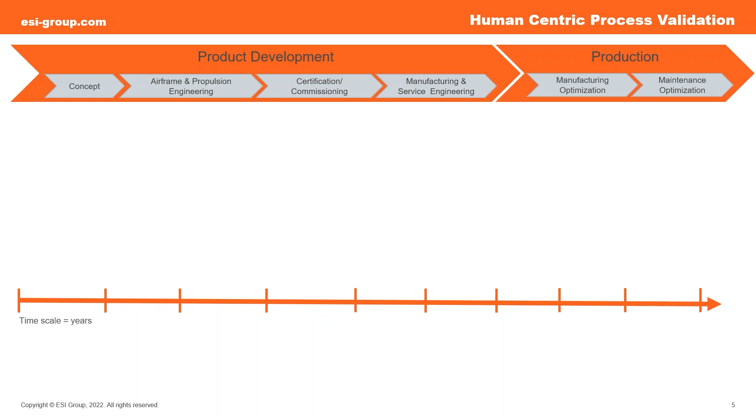Eric, back to you. Thank you. So when we talk about this idea of validating a human-centric process, or a better way to just say that besides human-centric, is any process or procedure that humans play an integral role in performing, and they have to interact with these new products or new aircraft in the context of performing some procedure or process with that new aircraft product.

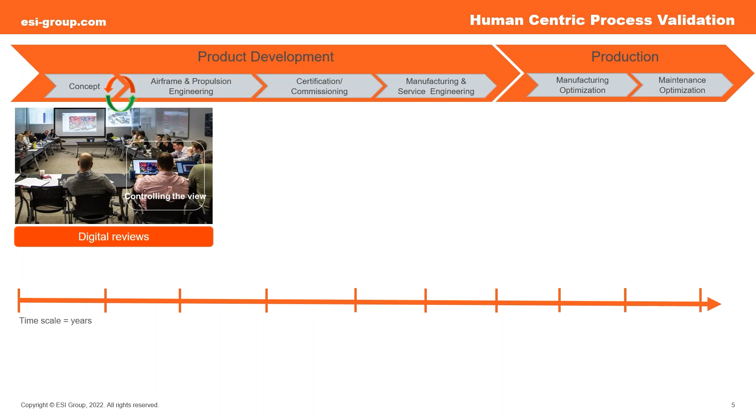A little bit later on, as we move away from just having the digital designs and we start manifesting, we start actually creating and bringing into reality physical proofs of concept, physical prototypes of those products. Maybe when we're getting ready for flight certification, maybe when we're getting that flight ready prototype out for certification and commissioning of that future aircraft. And then we actually have a physical aircraft to examine, to discuss, and explore.

Now, at that point is probably when we can focus on product engineering and product integration concerns, right? So if we're doing an engineering review, we're looking at things on screen, now is the time for us to recognize that something about the product geometry, something about that product engineering decision is inappropriate for packaging, for space claim, or for people to work in and around.

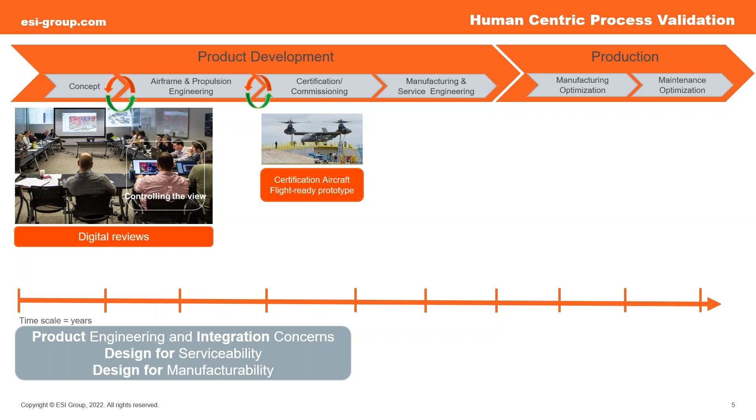Maybe we have to redesign the part to make it more serviceable, or maybe we want to redesign it to make it more manufacturable, or just so it better integrates with the rest of the aircraft. But once we cross past that milestone of having a flight-ready aircraft and getting that certification rubber stamp, that green light from the authorities, we start going into production ramp up.

This is when we start building up our production environments. Maybe we build that up off-site and migrate the tools over from a vendor or supplier into our production facilities, or maybe we build the production line in situ on site. But now when we're really building physical parts, physical prototypes, and pre-production flight-ready aircraft, this is when we actually learn a lot about how people will interact with that product.

And as we're doing that production ramp up, and trying to optimize that production environment, we make discoveries that tell us that earlier decision about the manufacturing process, or about the assembly process or assembly tooling, maybe wasn't such a good idea, and we want to go back to the drawing board and make new decisions about how we do assembly or service.

Then once we start getting those aircraft into production and we see serial production, and we have a fleet in service that's actually flying, that's when we start really learning the most about how people will perform those maintenance or service processes on that future aircraft. Or at this point, it's not a future aircraft anymore, it's a current day aircraft.

And the risk we run into is that every once in a while we'll run into something where we can't just make a new procedural change, we can't just make a new tooling or workspace change, but in fact we want to go back and change something about that product design.

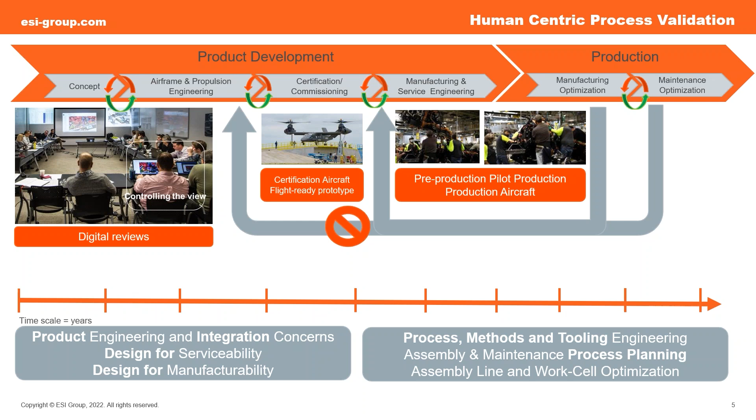We made all those design decisions before we went into certification. After we come out of certification, hopefully we're only focusing on those human interactions with the product in the context of the processes we're trying to define and validate.

Now, chances are those of you who said yes on that survey know that you're already doing some of this. Chances are you're using some of your CAD design tools, some digital mock-up or DMU tools, or you have some sort of process planning, human-based process planning tool that you're working on your desktop. That helps us recognize and potentially resolve quite a few problems that could emerge.

Now, if we couple that with using computer-aided simulations, what you might think of as deterministic simulation, to simulate and analyze how the aircraft is going to function and how it's going to be assembled, we can learn a lot and maybe solve some of those issues.

Maybe by building physical prototypes and getting more of our experts to apply their expertise and experience to looking at that aircraft design and the processes we're planning for it, we're able to resolve even more issues. But there's always that tip of the pyramid where we still risk that there could be something we didn't see, because we didn't know to go looking for it in that digital data.

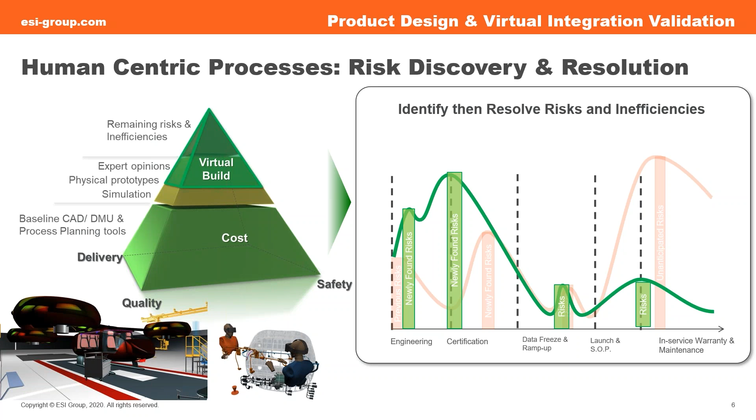the physical aircraft, we optimize our opportunities to design our way out of those issues before we actually put anybody at risk and risk any of our investment or our assets in engineering.

So generally, when we talk about this idea of doing human-centric process validation and doing this virtual product integration, what we want to do is we want to do all of these product-based decisions as early as possible by creating

for people an opportunity for them to validate their product integration decisions. Their design for service or their design for manufacturability decisions as early as possible.

And then after we go through and start stacking up the line and start preparing the tooling, preparing the workspace for doing this assembly and service work in the future, we want to make sure that those assembly and maintenance

process plans are validated, that we know that they work, and that there shouldn't be any surprises when we start going into physical build and physical mock-up.

We are no longer surprised and making new discoveries. These are things we've already observed and hopefully mitigated out of design. And that's what we mean when we use the phrase human-centric process validation.

So human-centric processes, as we asked in that poll earlier, how do you validate that and do you have a method? What I was asking was, do you have in your engineering process a time and a milestone

when you are validating that humans can perform that final assembly and final trim out or final construction of that aircraft.

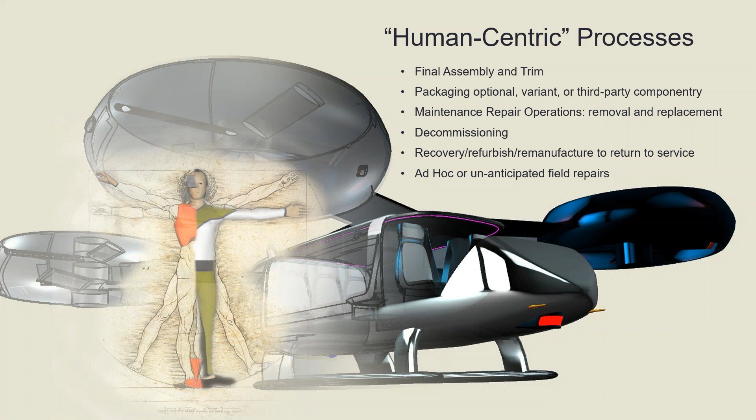So what we're going to do is we're going to go ahead and take a moment to launch another poll before I hand it over to Meredith, who's going to give us a few more examples of these procedural checks.

Great. Thank you, Eric. Attendees, how do you evaluate packaging, accessibility, ergonomics, and other factors when planning assembly and service processes?

During tooling or equipment buy-off at a supplier's site? During engineer milestone release or gate meetings? With physical prototypes or mock-ups and pilot builds? Continuously with virtual reality builds? Or you do not? We'll give you a moment to respond.

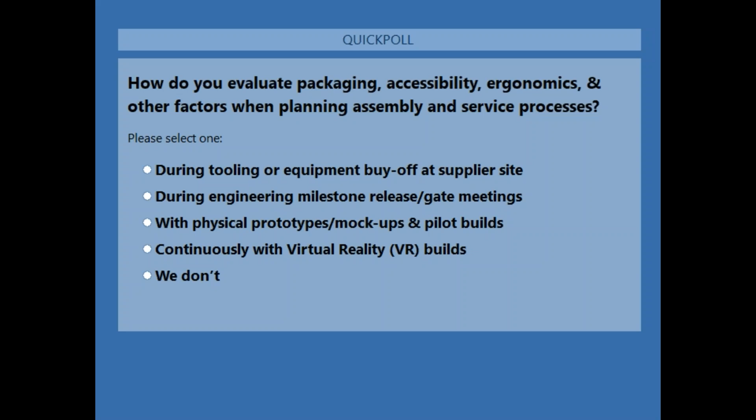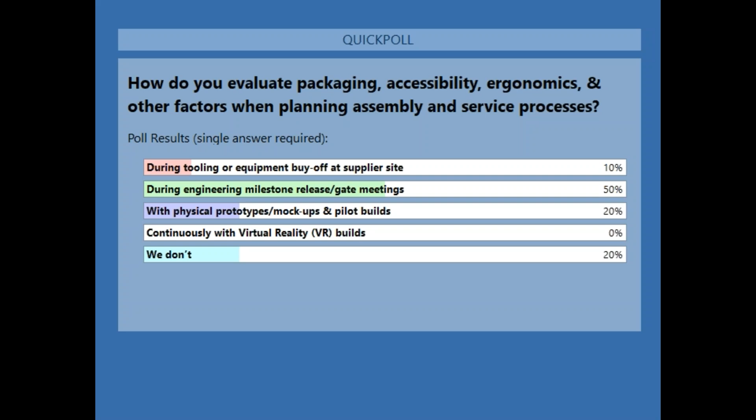And here are the results. 50% selected during engineering milestone release, tied with 20% each selected with physical prototypes or they do not, and 10% selected during tooling or equipment buy-off at supplier site.

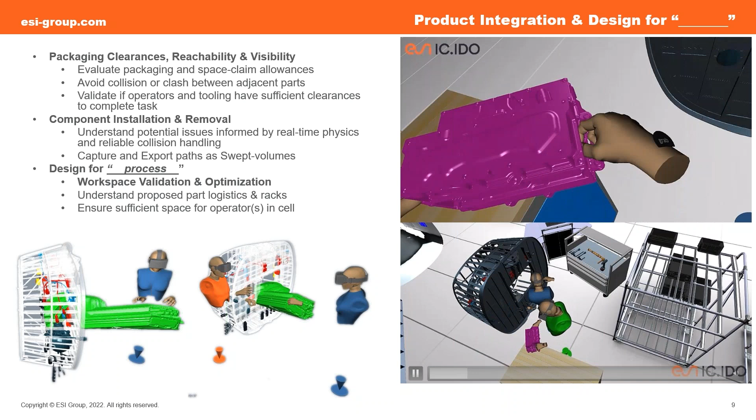Awesome, thank you Eric. You gave a really good introduction to VR and what that might look like. My goal here is to give context. Everyone wants to accomplish those things that you talked about, right? We want to identify our issues earlier. We want to understand how our operators are going to interact with our parts. We want to save our time and our money, right? So what exactly does that look like?

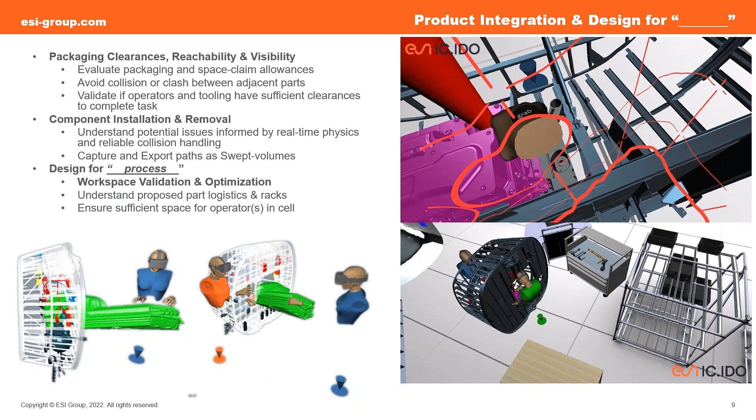So I performed an engineering review, which is what you're going to see on your screen here with this video. I'm immersed in IC.IDO here, and that's what you'll see in the top right of your screen - my view in IC.IDO. This is my first person interaction. And then on the bottom there, you'll see the third person external view.

So as you see in my view, I'm looking at a battery install. This is a sub-assembly where we're just looking at what path this battery is going to take. So I can get a really good understanding once I'm immersed of how I'm going to interact with this part, where my hands might be. If I have any reachability concerns or visibility issues, I'm going to be able to identify that right away. As soon as I'm installing this battery into its location, I'm going to be able to tell if there's any of those issues.

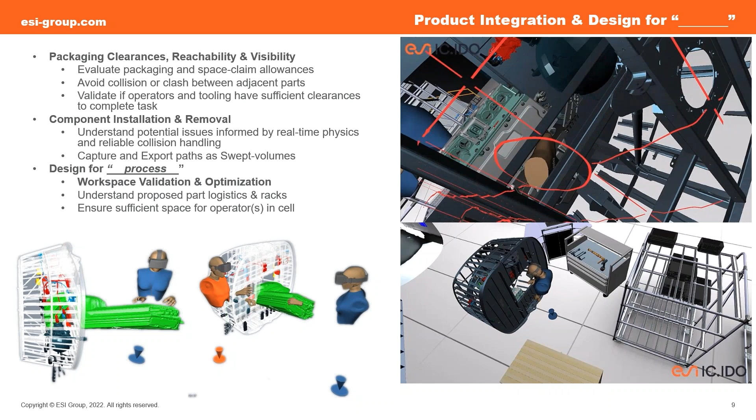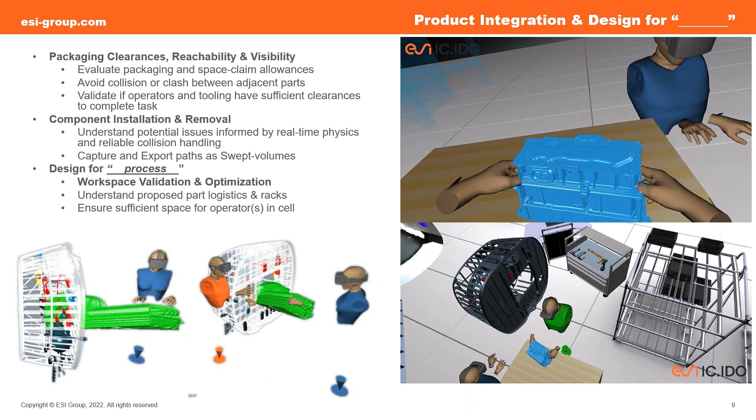So we're looking at the installation and removal of this battery. And you'll see in the bottom left of your screen that image looking at the swept volume, which is giving us the exact path that the part is taking. So I can record myself installing or removing this battery, and it's going to show me the exact path. I can get a good idea just by picking up that part, putting it into its position, but the swept volume is really going to quantitatively show me exactly what that looks like.

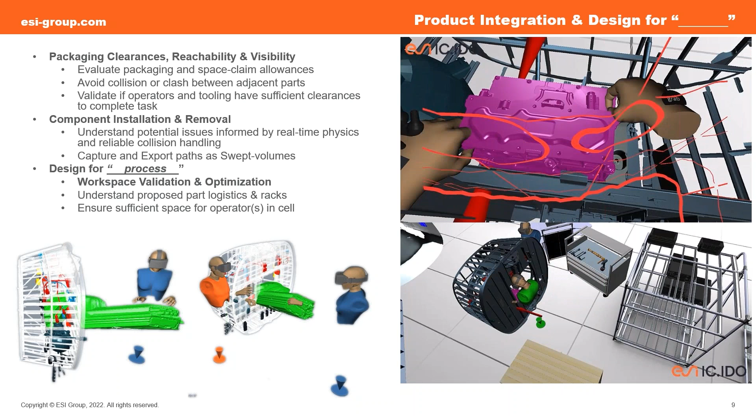So you'll see some of those collision arrows appearing there, and that's IC.IDO telling me that I have some sort of collision. My parts aren't allowed to pass through each other based on what I denoted the properties to be. So again, I'm getting a really realistic view of what this install might be.

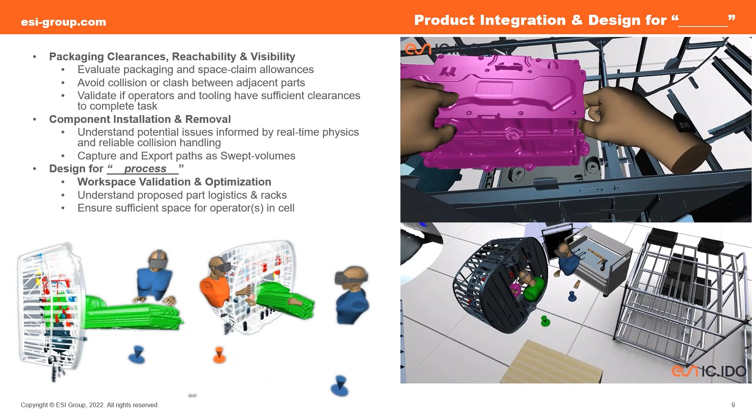And when I did this, I actually noticed it was really uncomfortable for me. I'm on the shorter side, and I still had to bend into that little small compartment. I had to tilt my head. You can kind of see my green avatar there tilting a little bit. And I asked my counterpart, why don't you try this out? Why don't you test this operation? Can you complete it from the backside?

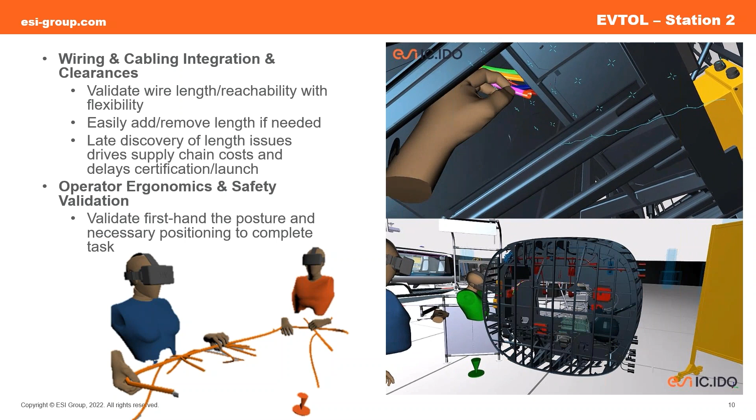And we're having a real design review here, right? Where I can ask for direct feedback right away, and understand what our operators will be doing without having to build one part. I'm just taking this straight from CAD, importing in, and getting an idea for what this build might look like. So again, I'm looking at the wiring and the cabling, being able to validate those lengths.

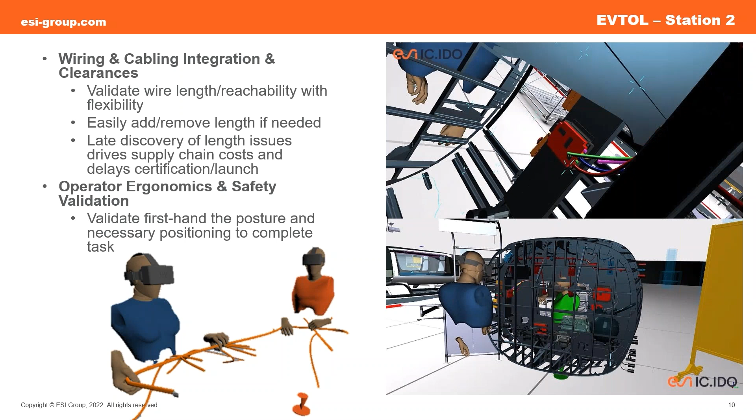I can quickly change those in and out if I see that maybe I have some slack, or maybe a cable doesn't fit into the slot that it needs to. And then just by performing this operation, I get an idea for what the operators are doing. So again, I can understand the posture that they might have to do to complete this task. And in this case, it wasn't the best. So again, I can give that feedback to my designers or whatever stakeholders I need to, and tell them that we're going to have to find another way to complete this operation, because we don't want our operators to go through this task every single time.

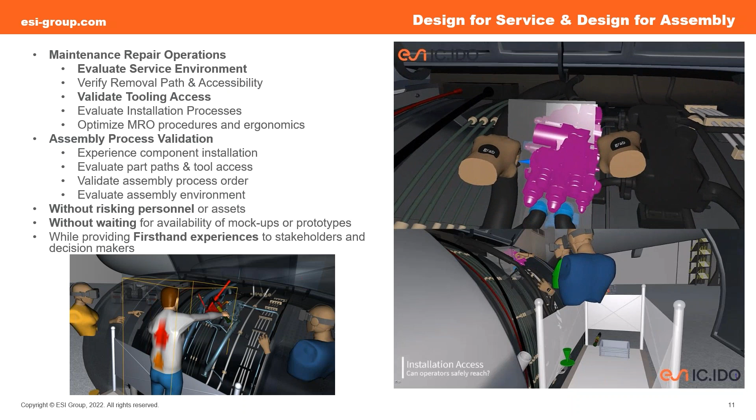So a different data set, we're looking at maintenance operations. We're in the hood of this compartment, looking at this pump install. You'll see my green avatar there, and you'll see that at the bottom, I'm lifted 20 feet in the air, and my avatar feet are kind of leaning over. I'm really reaching as far as I can, arms extended to install this pump.

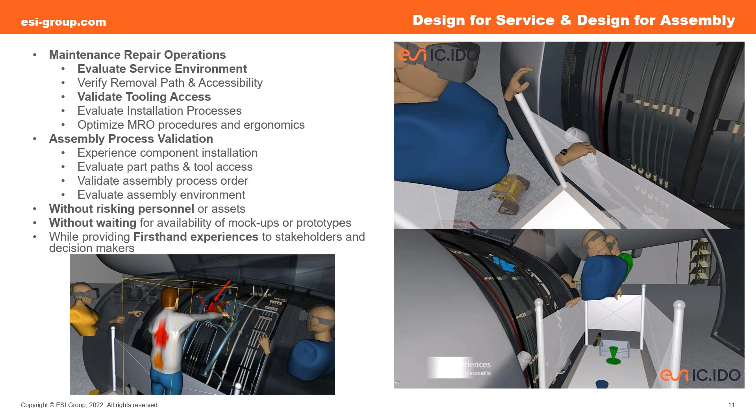And I eventually get it into place. I can test all of my clasps there. I can reach the bottom ones, but the top ones are still a little bit more difficult. Again, I asked my colleague, hey, why don't you try this out? This feels a bit of a reach for me, I'm leaning over the edge and already suspended 20 feet in the air. So maybe we need to figure out a different way for our operators to complete this.

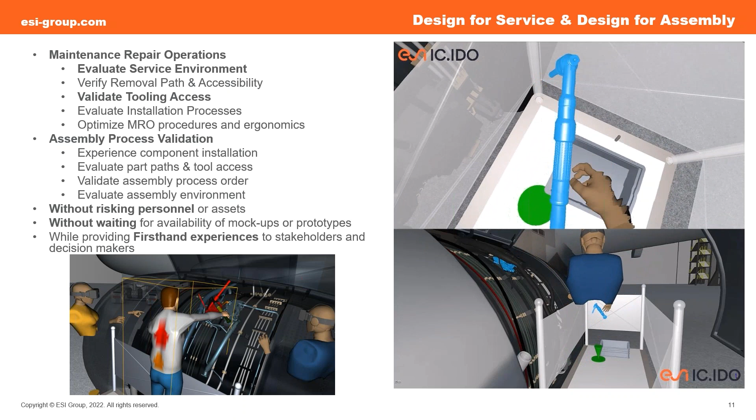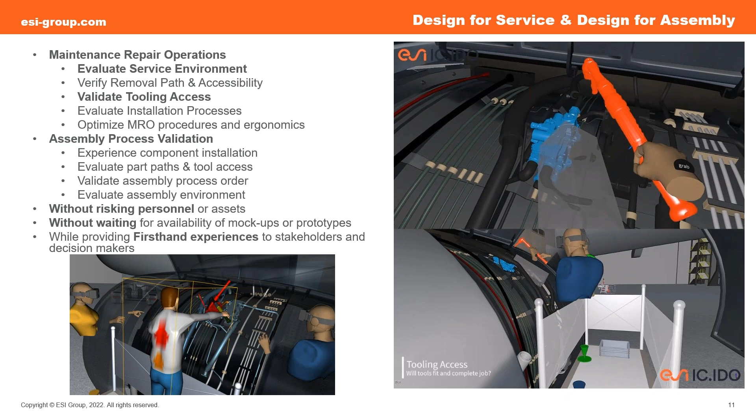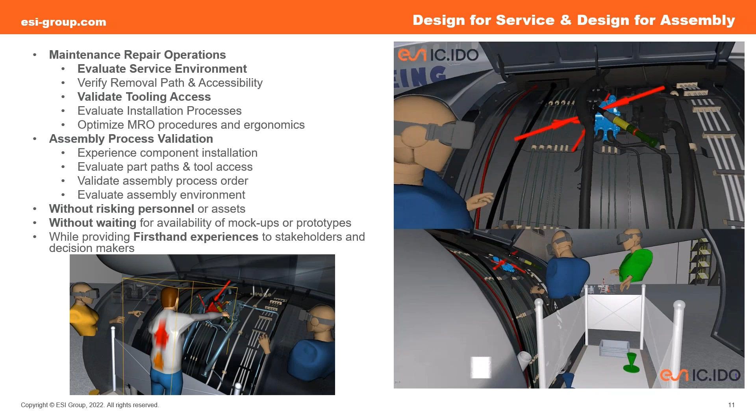So again, we're able to validate this before we have a part created. I can test my tooling too. I can import this 90-degree drill here, test that I can see exactly where I need to hit my points. Again, I see my collision arrows noting that maybe that's a little bit tighter of a squeeze there, and I might not be able to drill down on that as I would need to. So we can test this out ourselves, right? As I'm immersed, I'm experiencing this exactly in a 1-to-1 scale.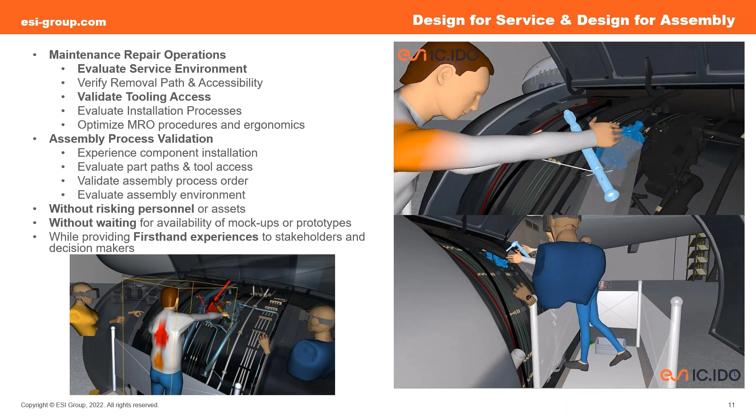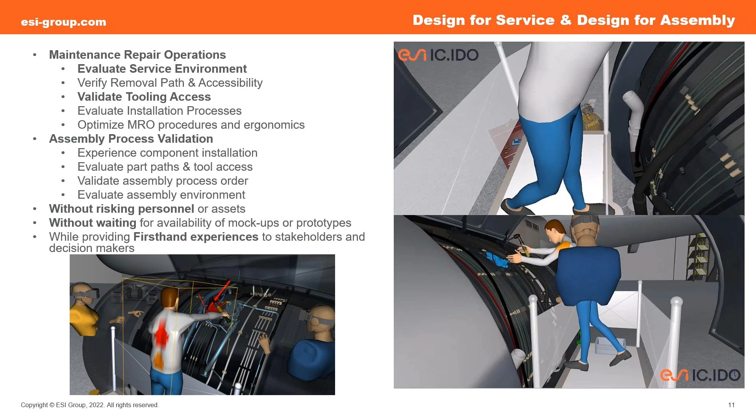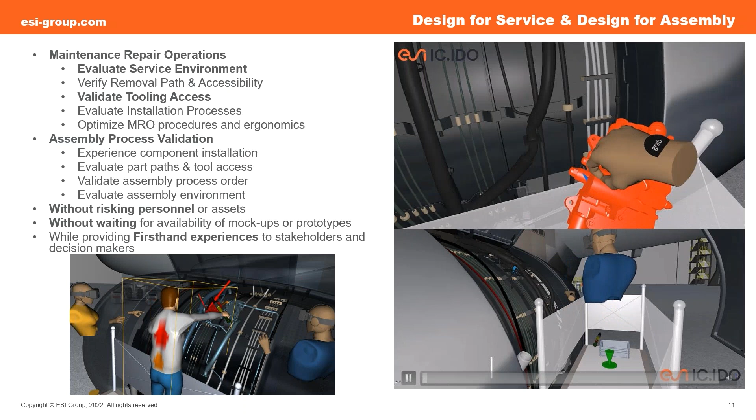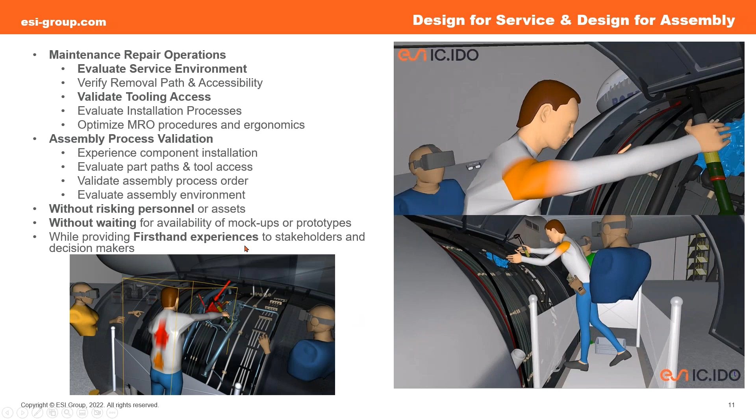But we can also do this by using our RAMSIS mannequin. So in IC.IDO, we have our partnership with Human Solutions, where I can bring in a mannequin and understand and see exactly quantitatively where some of those areas of concern might be. You'll see the shoulder, we've set these to our ergonomic standards, so I know exactly what is acceptable and not acceptable. In the bottom left picture, you'll see that maybe the back, just as I suspected, as I was bending into that compartment to install this pump, I felt that my back was kind of extended a little bit. So I can validate this with my RAMSIS mannequin and say this operation isn't going to be feasible because we have a lot of concerns on the back and shoulders. Again, just validating my experience that I had in VR.

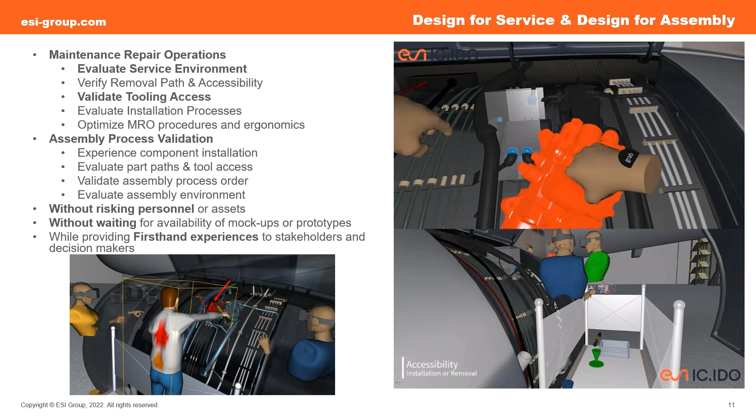So what about dynamic parts? We've looked at some installation, removal, serviceability and tooling. But what about our dynamic tools, things like lift assist? You can see here we have our lift assist, installing our part into the eVTOL body in white there.

And you'll see that we have all of our kinematics set up. So I can import my lift assist device in here, set up my kinematics and understand some of those clearances. Will this part be able to fit where it needs to? Is there any type of clearance issue we might have? Maybe we need to adjust the limitations of this assist device.

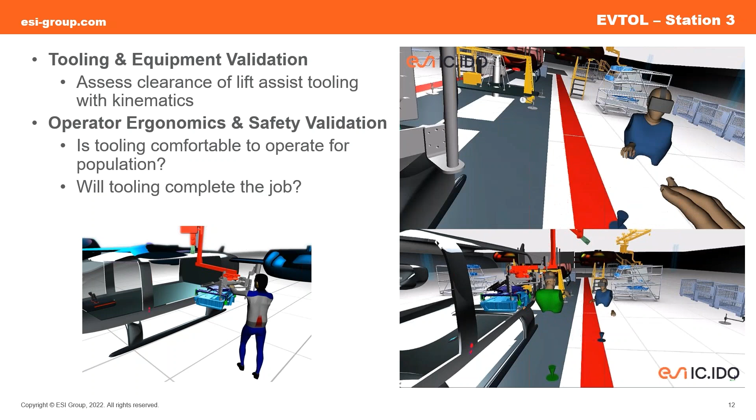When I was doing this operation, it felt pretty comfortable for me. Again, I'm a shorter person, but what about if my colleague who's 6 foot something puts on the headset? They can test this out too, and they can say maybe for someone your height it might be acceptable, but for someone a little bit taller, maybe there's some visibility concerns or reachability, etc. So again, we can add our kinematics to this and test out our tooling.

So what I can do is I can play that back and understand exactly how long it takes me to complete this operation. Maybe when we were designing this, we thought that an acceptable takt time might be 5 seconds or something. But once I record myself doing this operation and look back, I can say actually it took me 10 or 15 seconds. So that's something we need to consider when we're building our workstations here.

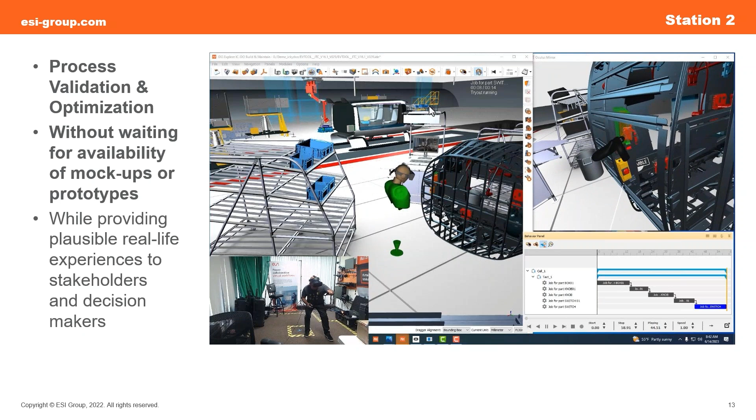We can get a better idea of what this subassembly station might look like before we even have any parts available, by looking at our current design. If the design changes, we can bring that in and validate it as well—just another tool we can use in IC.IDO to look at the sequence of steps. We originally planned to install part A, B, then C. But once I'm immersed in the station, putting myself in the operator's shoes, I realize it makes more sense to do B, C, A. These are things I can send back to our manufacturing team to share my experience.

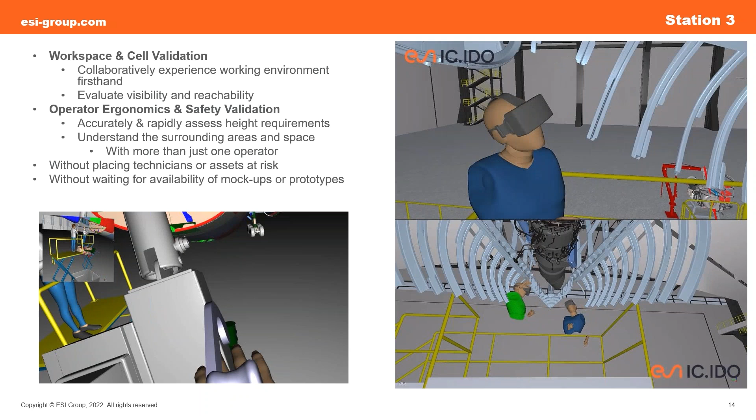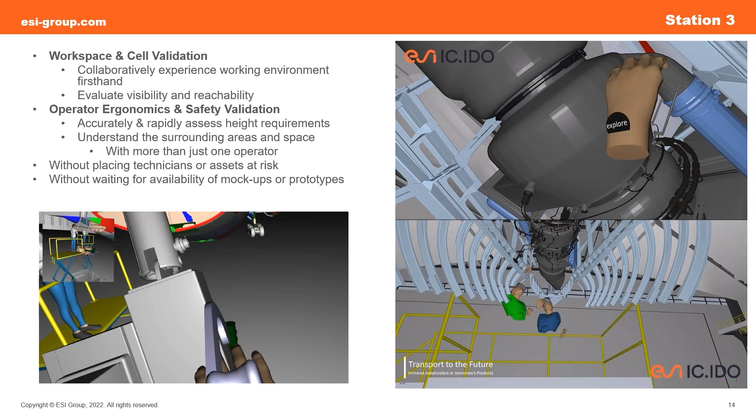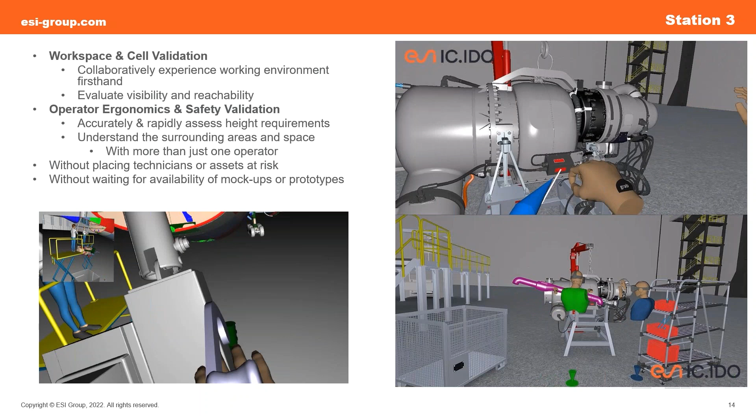You've noticed I've had a colleague with me in most of these engineering reviews. We've been doing reviews with back and forth feedback, but what might not be obvious is that this colleague was across the country, states away. We're able to jump into one session and get each other's feedback right away, so we don't need to be in the same room or sharing headsets back and forth. We can jump into one session and collaborate immediately.

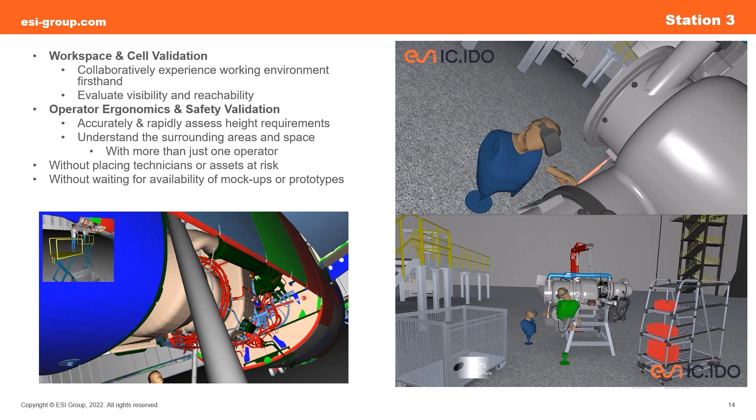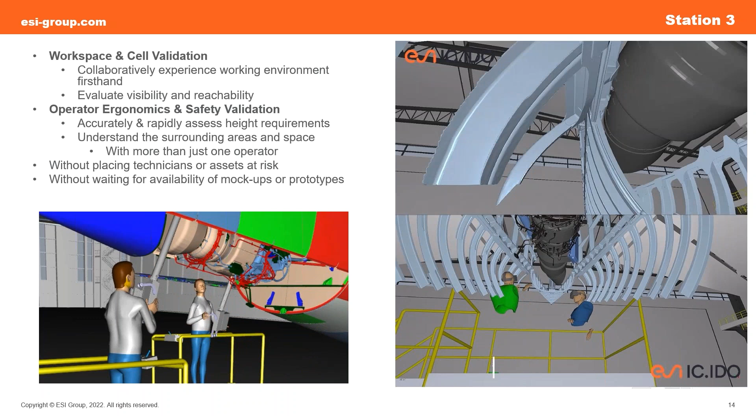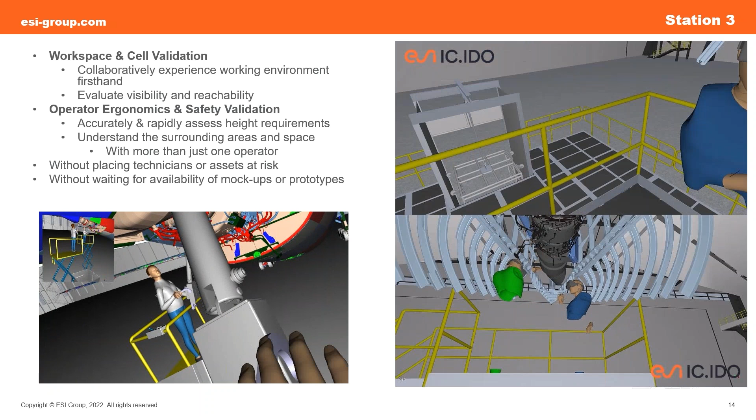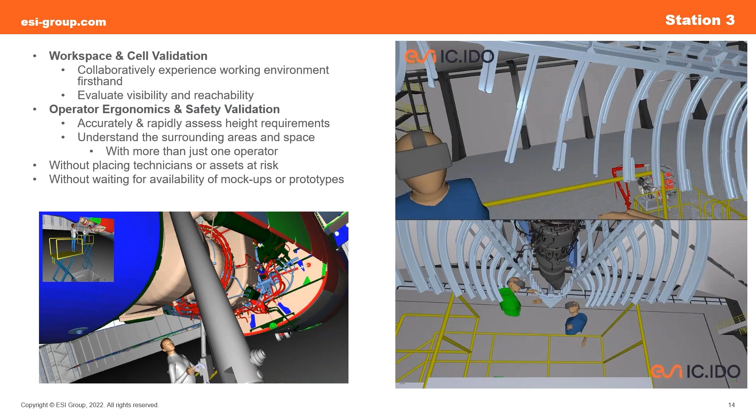We're looking at the install process of some of these stations and collaborating with each other in real time to understand potential concerns, as well as whether this operation needs two operators and what they'll be looking at. In this case, we're looking at head clearance—once immersed in the space, I can tell my head was right next to some sharp metal, which is a concern. It was a really tight space, and we weren't able to maneuver as well as we should. We were able to jump ahead in the future to understand what this will look like for our operators.

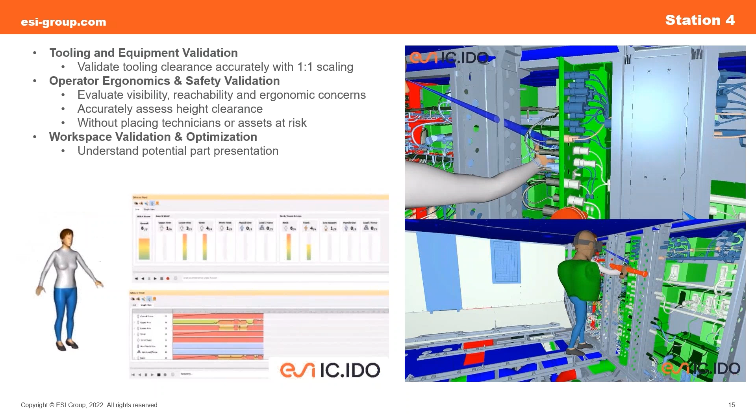Talking about ergonomics, one tool we often use is RULA, a common ergonomic evaluation tool—Rapid Upper Limb Assessment. We've looked at static poses of these operations; we have our mannequin on the left in a static pose where we're able to validate those concerns.

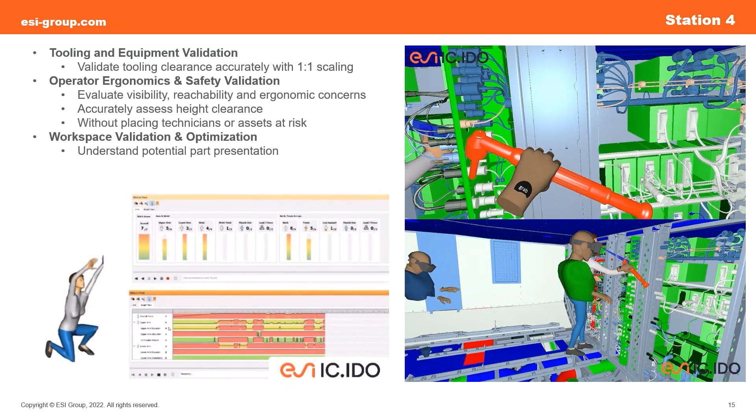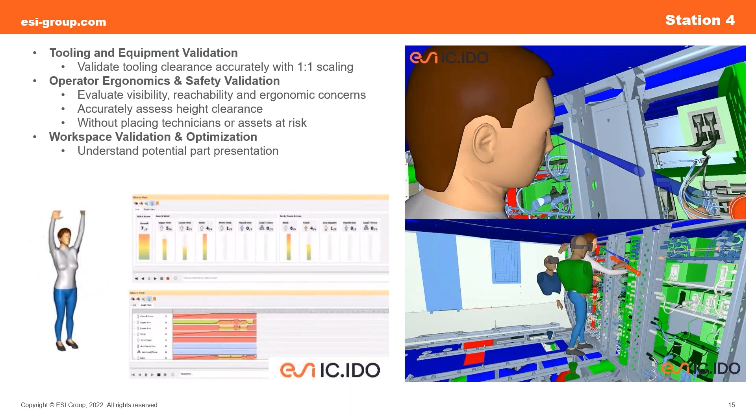But what about a more dynamic operation, which is exactly what you're seeing with the RULA animation on the left-hand side? We can record ourselves doing these operations and then play them back in real time to see exactly where areas of concern might be for our operators. We don't need to manually adjust this RAMSIS mannequin—we can just record ourselves doing the operation and play it back to understand where those concerns might potentially be.

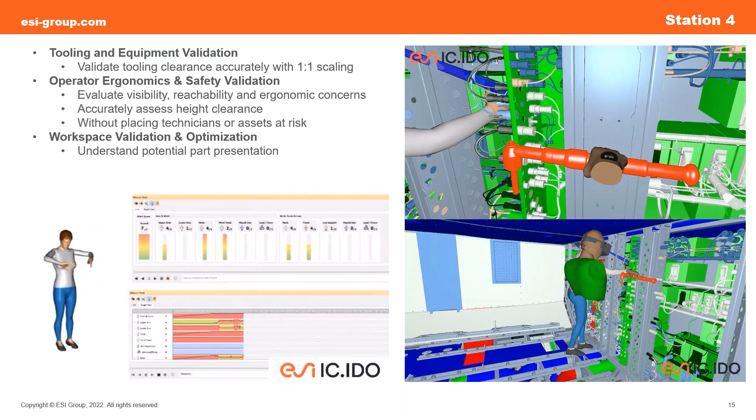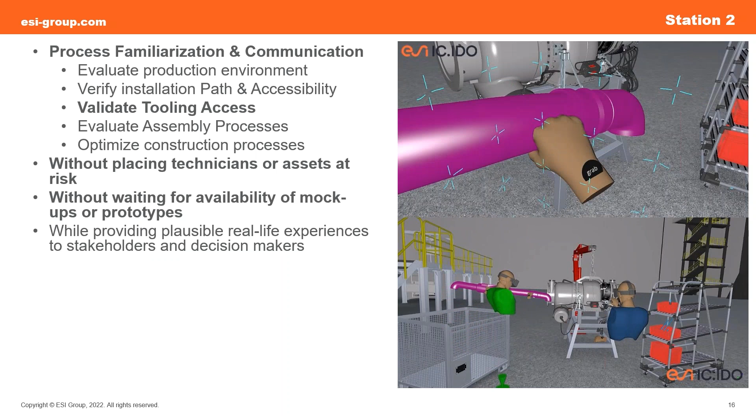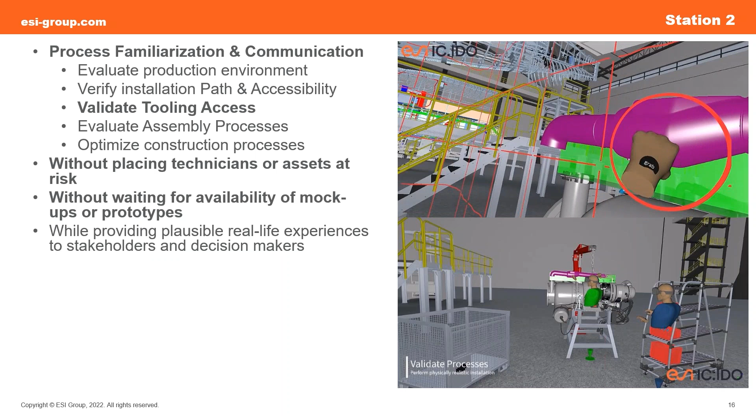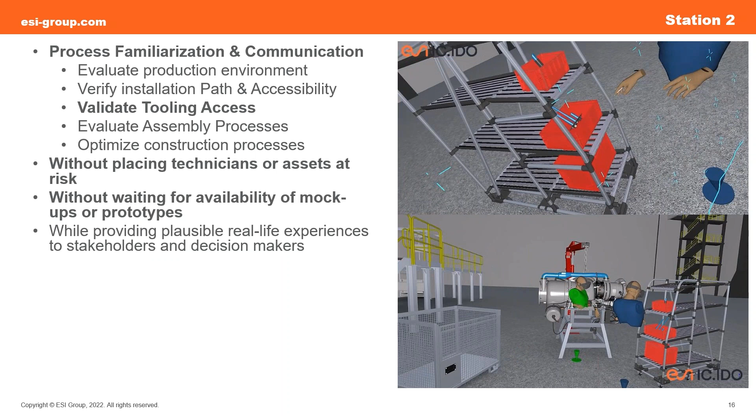Lastly, we become more familiar with our station. Once immersed in this session, I can understand exactly where my part presentation is and how I'm going to turn to pick up a part. If I'm leaning into that box, I know I had to reach in there, and it wasn't the easiest operation. I could check my visibility for the part presentation on the right-hand side and see if I have to reach high or bend over—becoming more familiar with the installation process and communicating potential concerns we might not have otherwise realized.

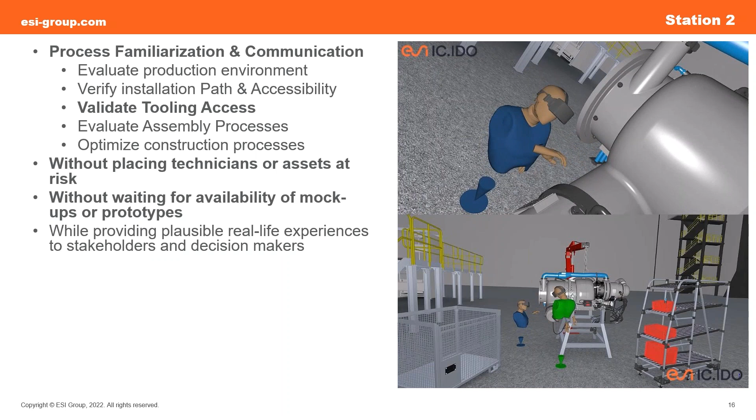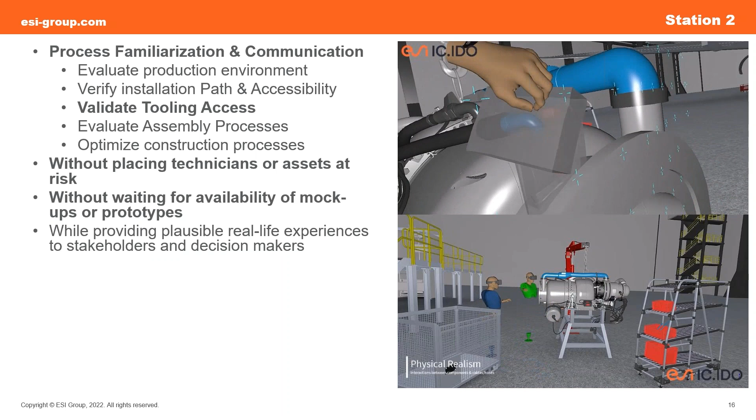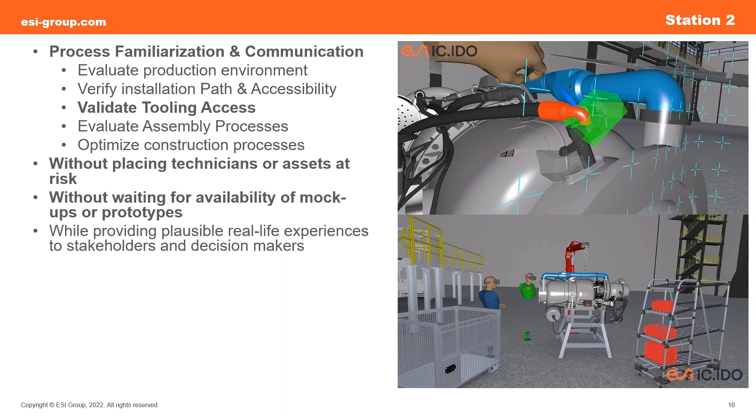Like Eric said, there's a lot we realize once we're in a session that we didn't anticipate beforehand. Here we have the install of a part on the bottom side of the engine—we thought it would be an easy install, just reaching under there, but really I need to bend down and make sure I'm driving that part into the correct area. There's a lot we can learn from these sessions in IC.IDO, testing out our existing data. Without even having one physical prototype, we're able to play with these mock-ups and understand some of our experiences.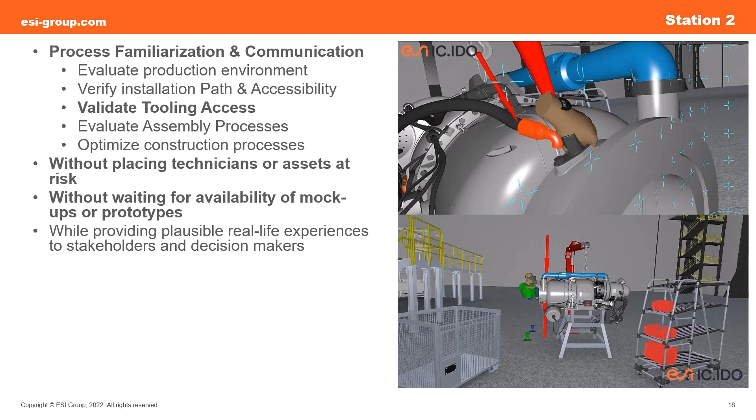Attendees, how do you accommodate the reduction of access to physical prototypes and mock-ups in product development? Process validation begins at start of production, simulations reviewed on screen by stakeholders and experts, carpentry 3D printed and other mock-ups, gamification engineers build VR simulations, or you use digital mock-up and virtual reality solutions.

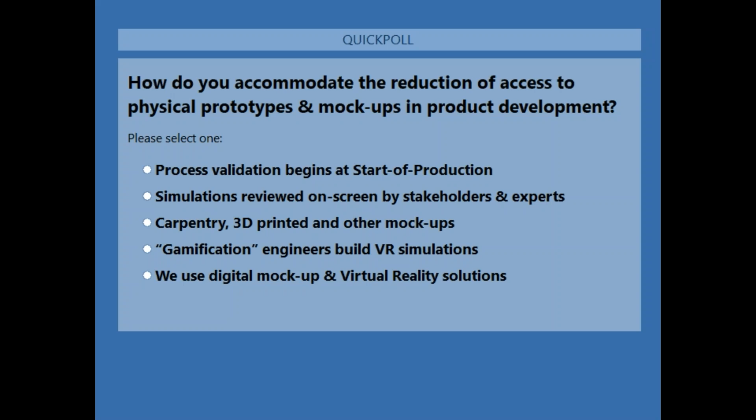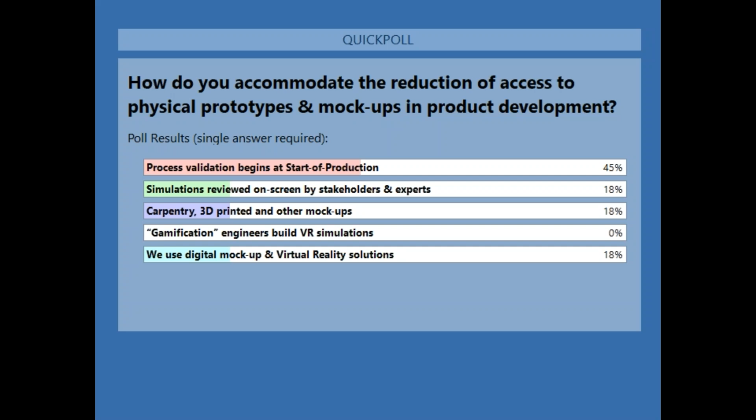45% selected process validation begins at start of production, and we have a three-way tie with 18% each selected simulations reviewed on screen, carpentry 3D printed and other mock-ups, and they use digital mock-up or VR solutions. Thank you so much for sharing.

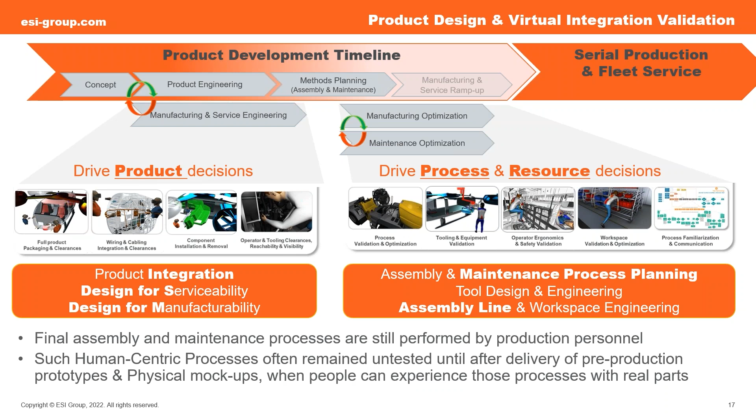So there's a great opportunity here for us to leverage ICIDO and virtual reality to help you validate these decisions. In fact, before we called our product ICIDO, we called it a visual decision platform - a platform for people to make decisions based on visual and virtual reality, so they could experience the aircraft of tomorrow, today, and resolve problems with product integration or design for service or maintenance long before anyone has to realize that physical aircraft.

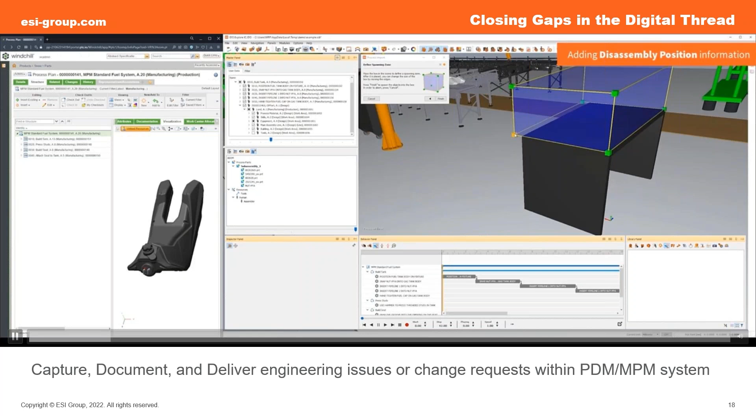Another important thing to discuss is that if we wait until start of production or realization of physical parts, there's a risk of impacting our digital thread, creating gaps in it. One of the most common gaps is this: once I have a physical aircraft and people handling physical tooling in a physical production or maintenance environment, by that time people stop updating the CAD data, and they don't always send changes they make to product or tooling geometry, or the processes they've defined, back into the system.

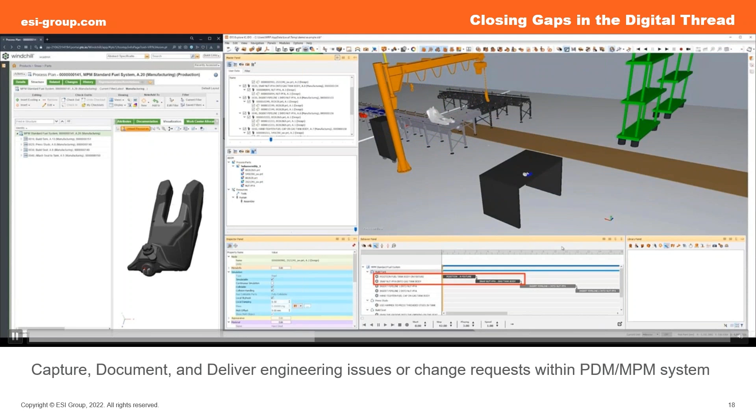So what's being illustrated on screen right now is an example of our integration with PLM and PDM systems. In this case, we're looking at PTC's Windchill product. We've taken product and process information from the Windchill environment and fed it directly into ICIDO to instantiate an ICIDO virtual reality review. Upon bringing that geometry and process definition into the ICIDO working environment, you can see another one of my colleagues performing an immersive tryout of the proposed process.

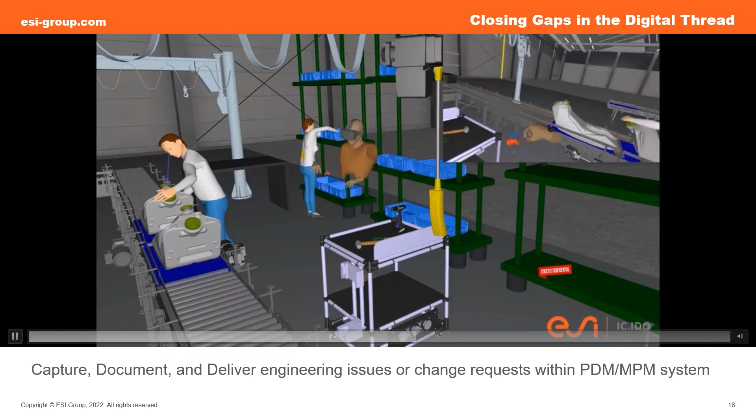So now we have a much closer, more narrowly defined digital thread that we can close by giving people an opportunity to experience, based only on digital data, only on the virtual design data, what it's like to do this assembly operation, manage this assembly or construction environment, walk around in it, and feel for themselves what it's like to pick up a part of that fuel tank, go pick up that tool, carry it over to do the next assembly operation. And we can validate all of this.

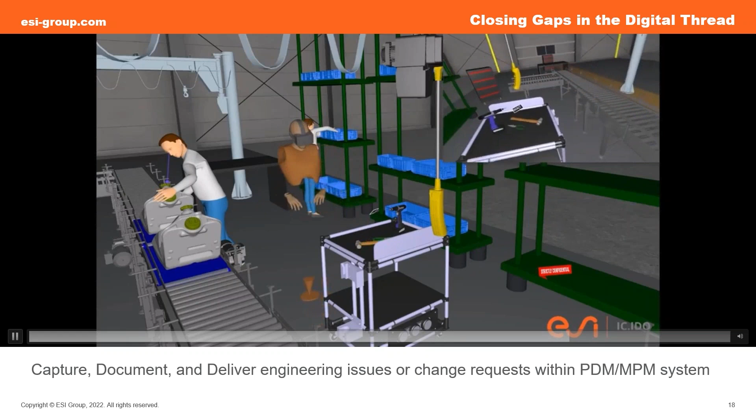If we observed something we didn't like about that process and wanted to make a change, we could annotate and record that change and pass it back to the MPM, the manufacturing process management tool, so that becomes part of that digital trace, that digital thread.

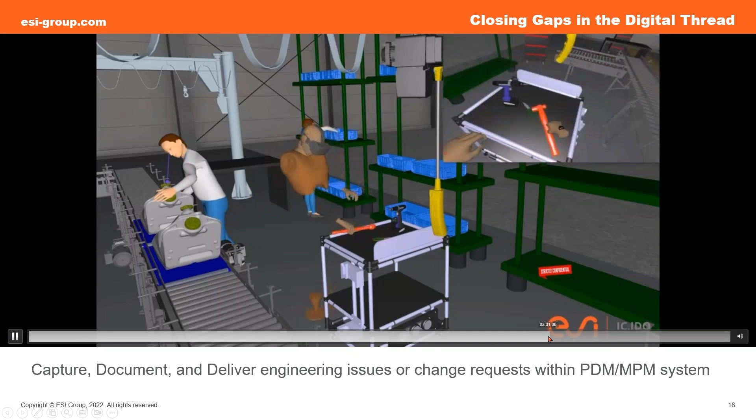I think also just a moment ago in the video, you saw the footpath I was traversing, walking back and forth across that floor, and I can get a really good idea of how many trips back and forth people are making trying to do this job - where the free walking space needs to be so we can plan their work environment appropriately, so we can have a better idea. Is it plausible?

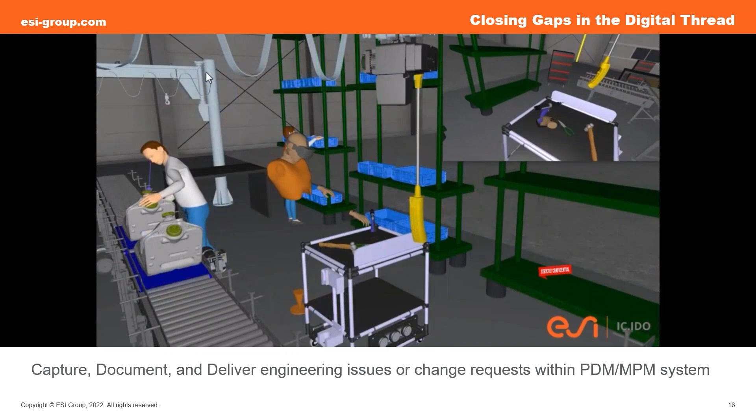Is it practical to ask a human being to do this job in the future? When the answer is no, that it's not practical, not feasible, we have time enough, and we have not marched so far down towards start of production that we can't remake a new decision. That's one of the key aspects of how we see people having an opportunity to close that gap in the digital thread.

One of the last things I want to show everyone before we go into Q&A is to double down on this idea of collaboration. The more I can collaborate and introduce stakeholders, my peers, my production personnel, the people from our distributed chain of MRO operations throughout the world, if I can just teleport them, transport them into the future, and transport them all the way around the earth, normally we would have to fly people to the site to experience this physical prototype.

So if I was waiting for start of production at our pilot facility, or if I had our carpenters building physical mock-ups of this proposed electric vertical takeoff and landing, or eVTOL aircraft, I don't have to wait until I built that thing up. I don't have to wait until it's real. And if I did have a pre-production aircraft, a certification aircraft already, I'm not putting that asset at risk in order to do further validations.

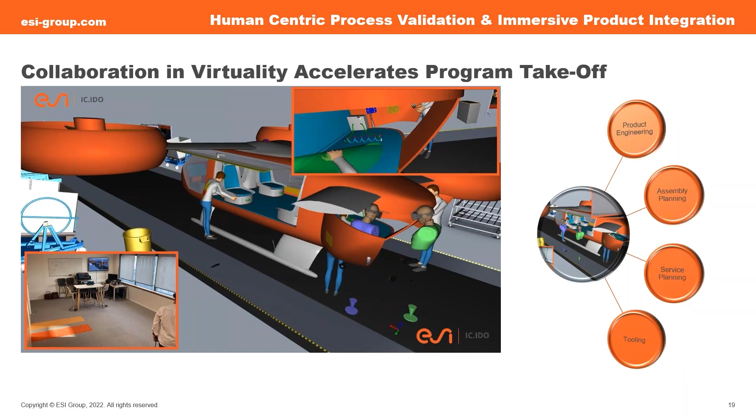Here's your first question. On average, how long does it take to set up a VR simulation? That's kind of a tricky question, because part of the VR simulation is the creation of that geometry data, but we're not going to include that. So we're going to assume that you already have the CAD data of either the product or that process.

Really, in order to define that virtual reality experience, if you just want to see it in VR, as quickly as you can drag the data from your CAD interface into the IC.IDO interface, and as quickly as that data can write over from one system to the other, you will be able to, in a matter of minutes, see it in VR, walk around it in VR, and have some very basic interactions with it.

If you wanted to do something more detailed, like build up the physics of rigid objects - that battery you saw us loading - maybe that would take about 5 minutes to define as a solid rigid object, and that bulkhead it was installed in as another solid rigid object, maybe 2 minutes. Then if we had to build up the interactions of that tool load, that assist mechanism, that would take someone like Meredith about 5 or 10 minutes. It would take an amateur at driving the software like myself 30 minutes to a half hour. But either way, it's much faster than having a carpenter build that up, or trying to make a mock-up out of Lego or 3D print. We can have that in minutes, explorable virtually with that interaction in a matter of minutes.